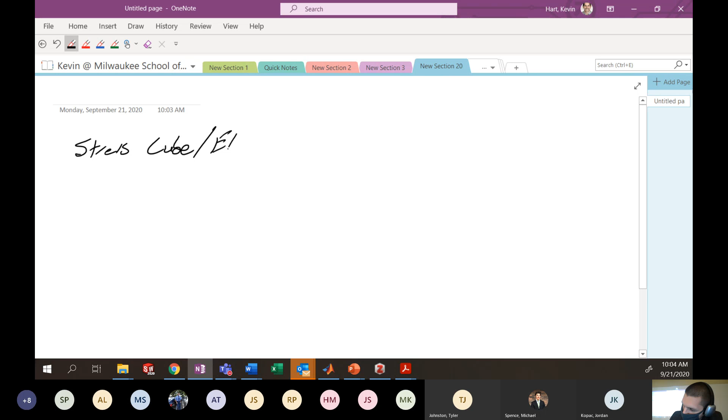Remember this stress cube that we had here sort of looks something like this. And it represented the 3 orthogonal cuts we could make at any particular point in a material, and the 9 states of stress that might result from those 3 orthogonal cuts. If you have something here like XYZ, you could have your series of stresses, the normal stresses coming off of each one of these faces, like sigma Z, sigma Y, sigma X, as well as the shear stresses that you could possibly have. I'm not going to label them all because I'm a little short on space here.

But you get the general idea. Here are the shear stresses tau-ij on all the faces. Remember, when we're talking about using subscripts ij, we're talking about the i face and the j direction. So this is our stress cube and element, and I was relating this back to what you probably learned in 2004.

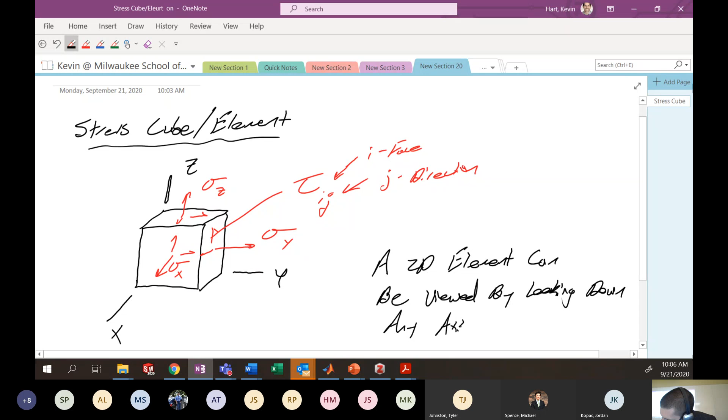That was like one side of this particular cube, which is like a two-dimensional element. A 2D element can be viewed by looking down any axis. This is probably what you saw in 2004. So if we, for instance, looked down the z-axis...

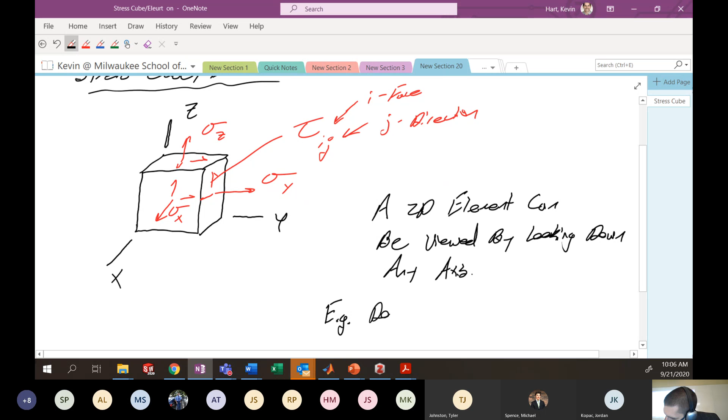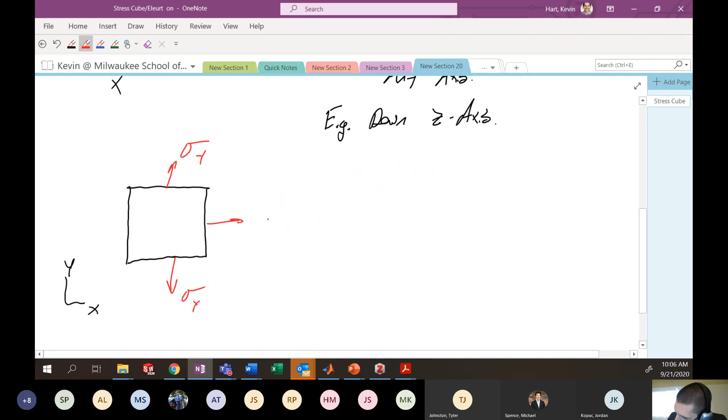You might see something like this, where we might have x, y, and you would see stresses coming off of this particular element. Here are your normal stresses in y. Here's your normal stress in x, sort of on both sides. And then you have your shear stresses, which are acting on their appropriate faces and directions. So here's something like tau-xy. And all these shear stresses I've drawn here are more or less equivalent.

So we know that on the top face you would have what is tau-yx, on the y face in the x direction, but they're equivalent by conservation of momentum. So those are your possible stress states on a 2D element, and here we're assuming plane stress...

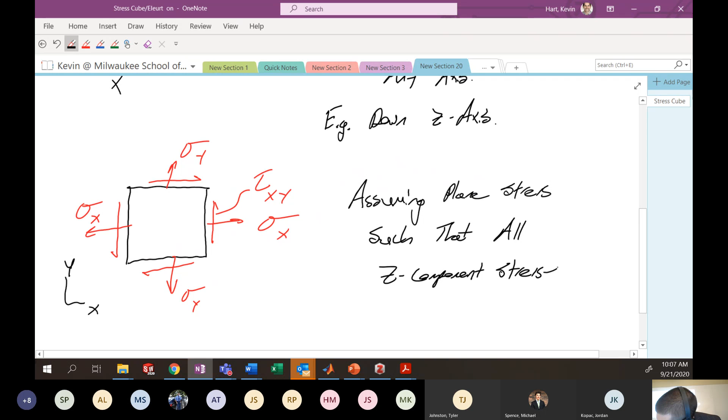Plane stress such that all z component stresses are 0. So that would be like normal stress in z and any shear stress associated with z.

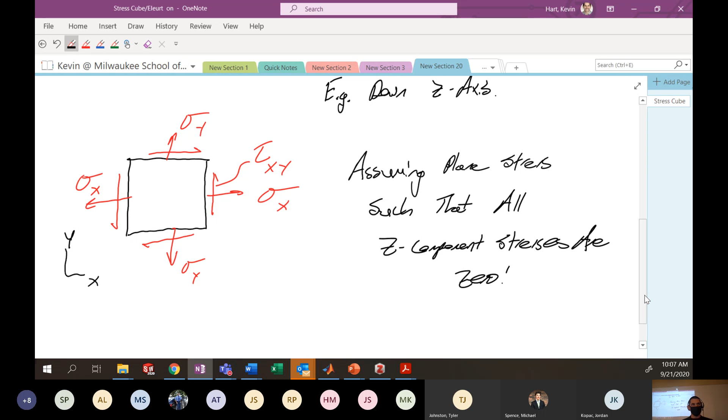So tau-xz, tau-yz, tau-zy, tau-zx - all of those components are 0, and this is probably where you did a lot of work in 2004 on an element that looked a lot like this. So I'm reviewing this, and one of the first things I want to talk about is stress transformations, and that's about where we left off.

We were looking at this particular element, and we want to talk about the stress not in this coordinate system, but some alternative coordinate system that is rotated from this xy coordinate system some amount. So, stress transformation.

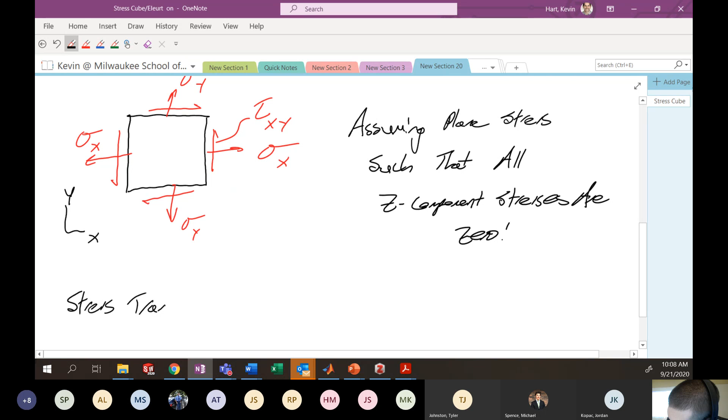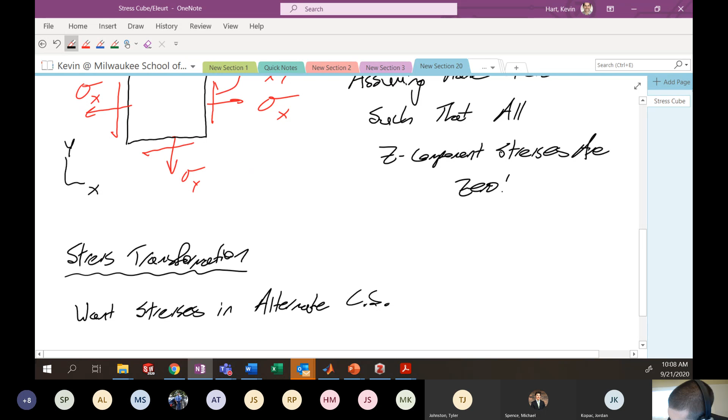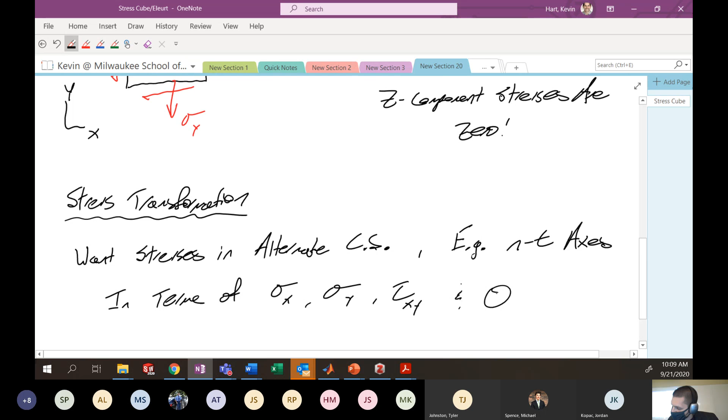If we want stresses in an alternate coordinate system, let's say the n-t axes, in terms of sigma-x, sigma-y, tau-xy - these stress values that we already know in our current coordinate system - and the rotation angle theta, which exists between the xy coordinate system and the coordinate system you want to rotate to, which might be the n-t coordinate system...

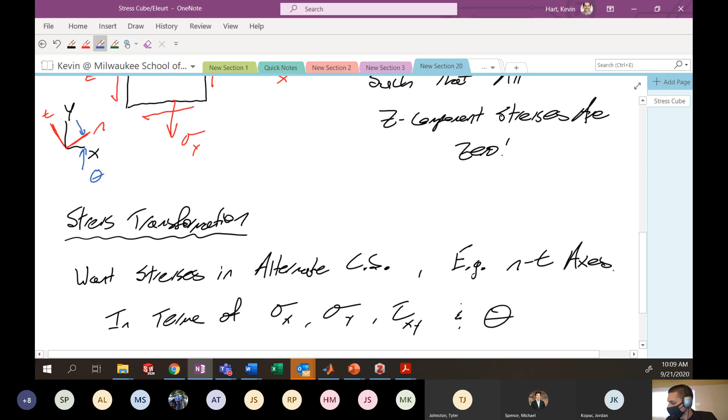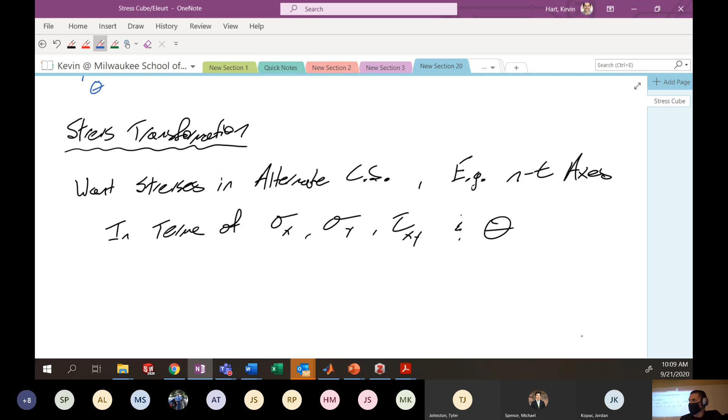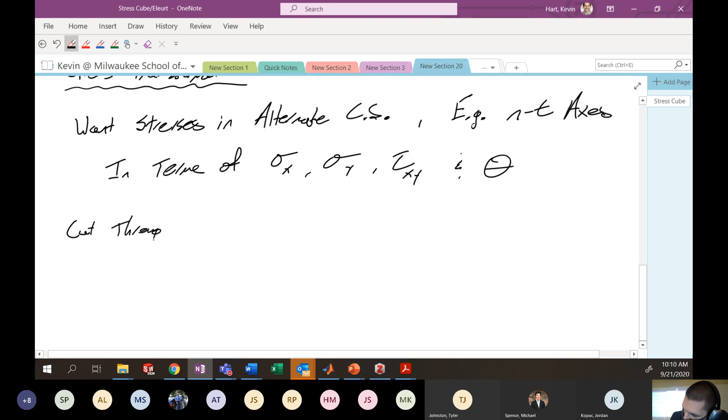So we looked at how to do this, and the basic way we're going to do this is we're going to cut through our two-dimensional element, sort of along the t direction, to get what looks like a triangular element. So cut through the t-axis, and you're ultimately going to end up with some triangular element that looks like this here.

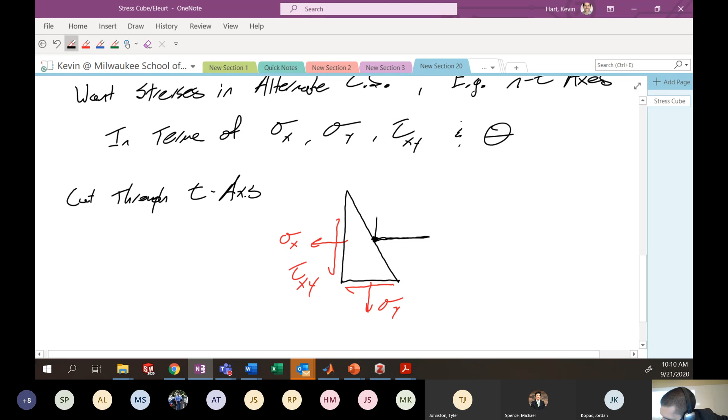Where we still have, on the backside of our element, the x and y components of the normal stress, and we're going to retain our shear stress on the backside in terms of what we know. And we have our coordinate systems - let's establish our coordinate system at the center of this cut section here, which is x, y. And we have our new coordinate system coming off of this general direction, which is n and t.

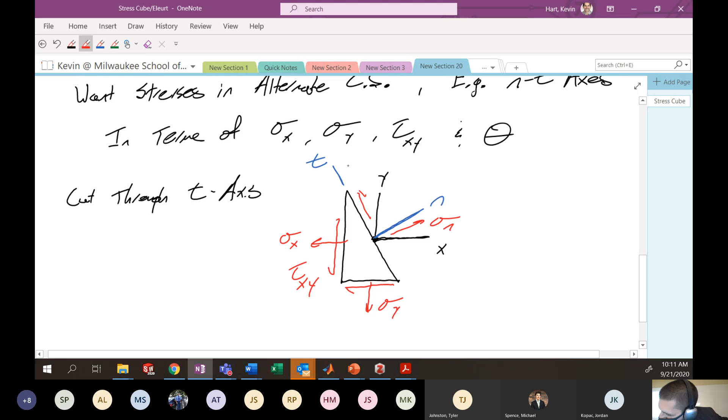So what we're striving for is what is the normal stress on this new face that we've created, and what is the shear stress on this new face. So we're looking for what is this sigma-n, and what is the shear stress across this face, which is tau-nt. I'll put these question marks here, because that's what we're after.

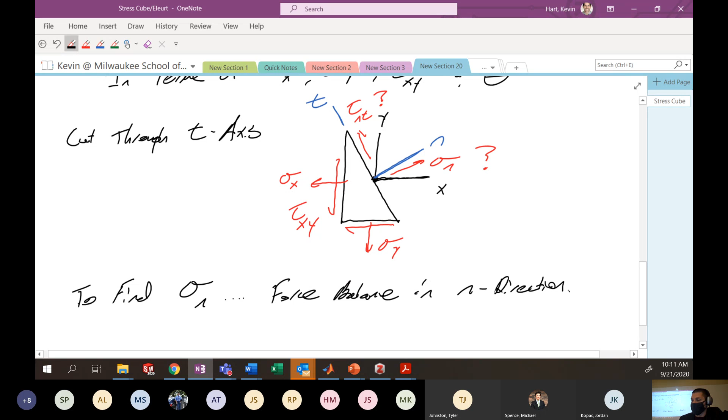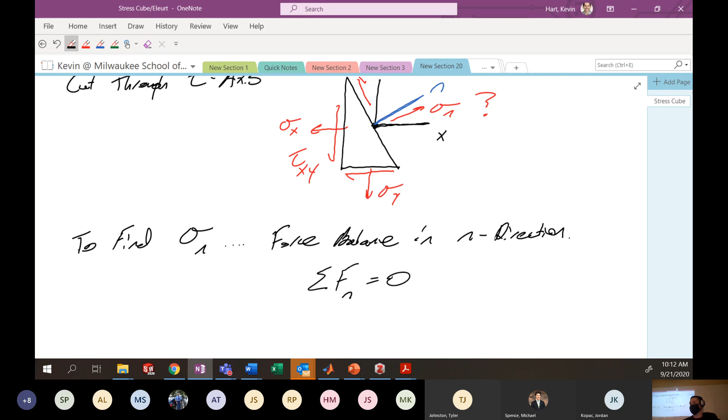So we started in on this last time, and we went through the derivation and said to find sigma-n, we want a force balance in the n direction. So in math terms, since we all speak math, the sum of the forces in the n direction is equal to 0. So what that means is we have to turn all the stress components we see into force components, and then equate them all to 0, and see what we get.

So we went through that rigmarole last time, and I'll wave my magic hand and point you to that lecture, which was in the Wayback Machine on Friday.

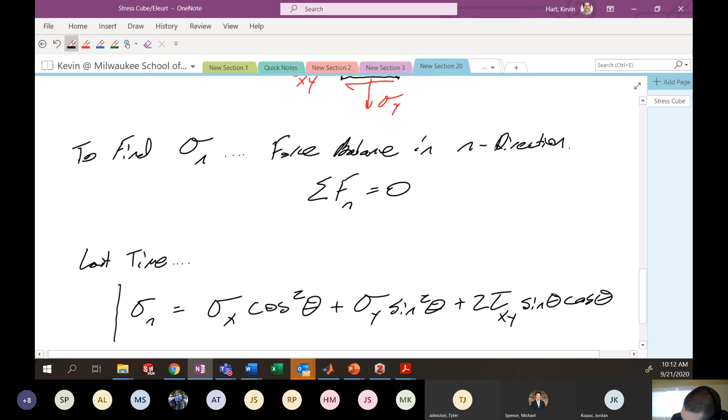We established this equation. We found that the normal stress in the n direction after this transformation is sigma x cosine squared theta plus sigma y sine squared theta plus 2 times tau xy sine theta cosine theta. This is the expression that resulted after we did our force balance to get normal stress in the n direction in terms of stresses you already knew in the xy direction and tau xy, as well as the rotation angle theta between your coordinate systems. This is the stress transformation equation that tells us this new normal stress.

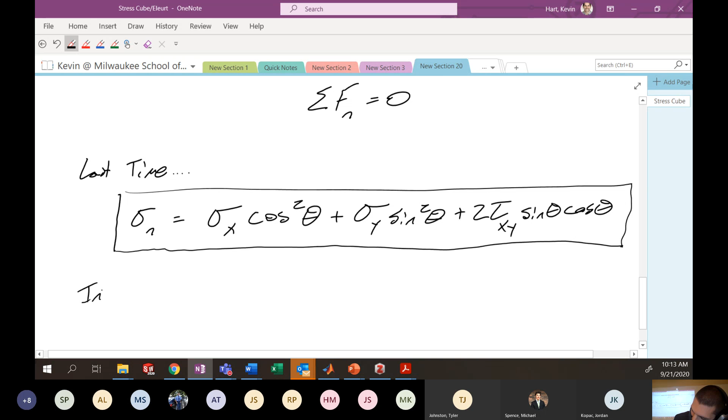Now, it is often presented in a different form, using the double angle identity. We can transform a cosine squared term into a cosine 2 theta term, and it's sometimes presented that way. I'll just write this without the derivation, which you may or may not have used before. I'm hoping you saw at least this standard equation with cosine squared, sine squared terms. Maybe you used the double angle form, which looks similar, with a couple of caveats.

Sigma x plus sigma y over 2, plus sigma x minus sigma y over 2 times cosine 2 theta, and this is going to be plus tau xy times sine 2 theta. So this is the double angle form of that exact equation.

These equations are equivalent. They'll give you the same answer regardless of which one you use. I think the double angle form is on your equation sheet, so maybe that's generally preferred, but I present both here for clarity's sake. Both of these equations can be gotten from the force balance in the n direction.

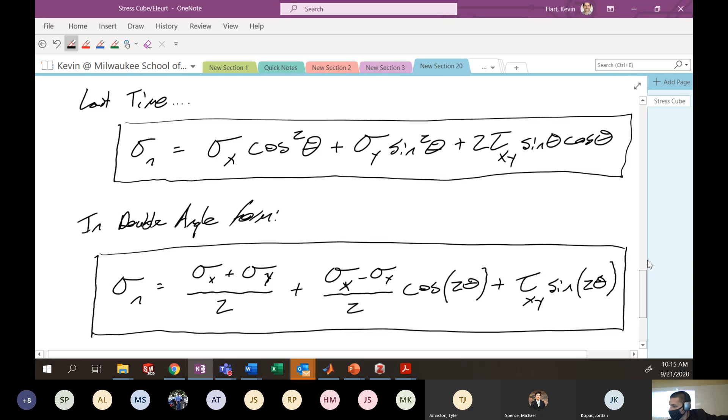Now, we could go through a similar procedure with a force balance not in the n direction, but in the t direction. We've calculated what is sigma n. If we go back to our element up here, that's a check mark for sigma n. But now we also want to determine tau nt, this shear stress across the face.

The shear stress is mostly aligned in the T direction. So it's on the N face in the T direction, so we're going to do a similar thing, where we do a force balance not in the N, but in the T. I'm going to gloss over that. So for tau nt, use sum of the forces in the T direction equals 0. Good old statics, right? Sum of the forces in one direction, sum of the forces in the other.

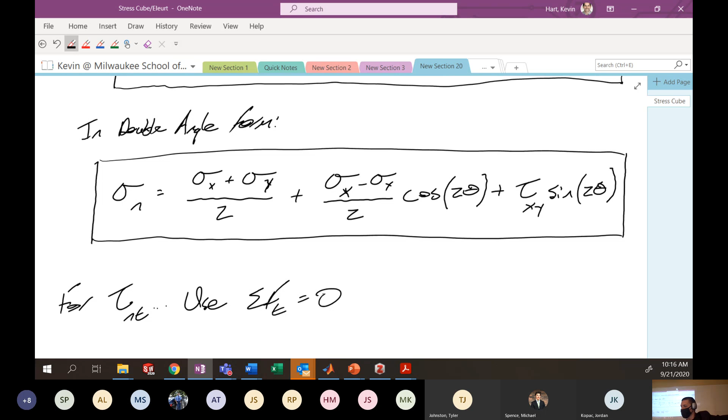Could also do sum of the moments, but since this is an infinitesimally small element, we don't have any moment arms, so that's not really helpful. It's a similar idea, similar derivation. I'm not going to go through the whole derivation, I'm just going to present the final result.

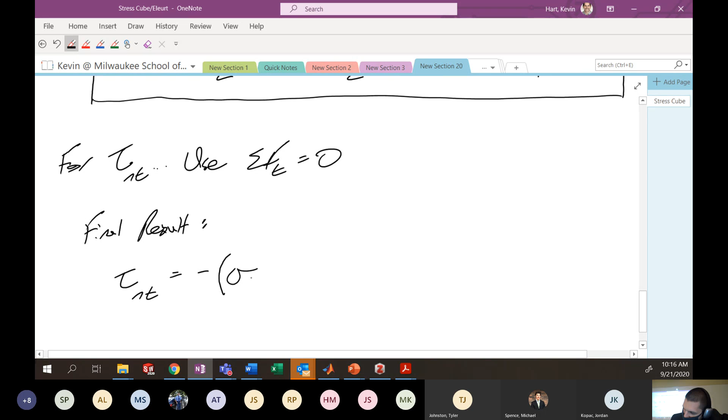That is, if you need the shear stress in this alternate coordinate system on the N face in the T direction, you're going to have negative quantity sigma x minus sigma y times sine theta times cosine theta. And this will be plus tau xy times cosine squared theta minus sine squared theta.

All right, this is the single angle form. If you're feeling really antsy, you can derive this yourself, and I'll be very impressed. I'll give you a gold star. I'll literally go to the store and buy some gold stars and give them to you.

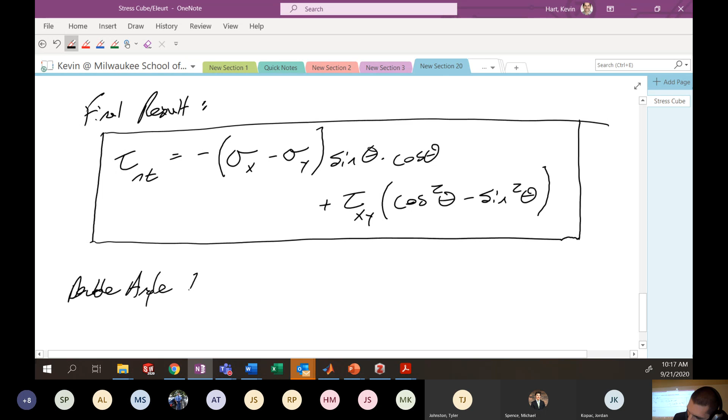All right, so the double angle form is going to be the negative quantity sigma x minus sigma y, all this over 2, times sine 2 theta. And then this is plus tau xy cosine 2 theta. So this is the double angle form.

Now, why would these stress transformation equations generally be useful? Well, you've kind of already seen an example of how it could be useful in your lab. We have these strain gauges that are plopped onto your piece. Let's say the strain gauges give you some strain reading in some direction and you convert that to stress in that direction. But the stress you have with that coordinate system is not necessarily the coordinate system you want. You might have to do your stress transformations to get to the coordinate system you care about, and this is how you might do that.

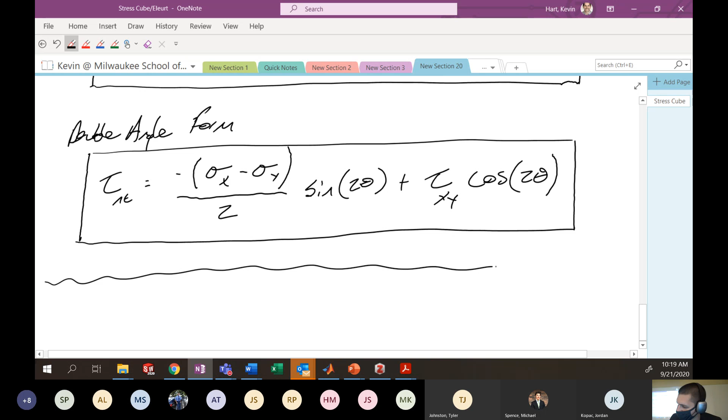This is where I would take a sip of my coffee. I remember those previous times when I could have drinks in class. The good old days.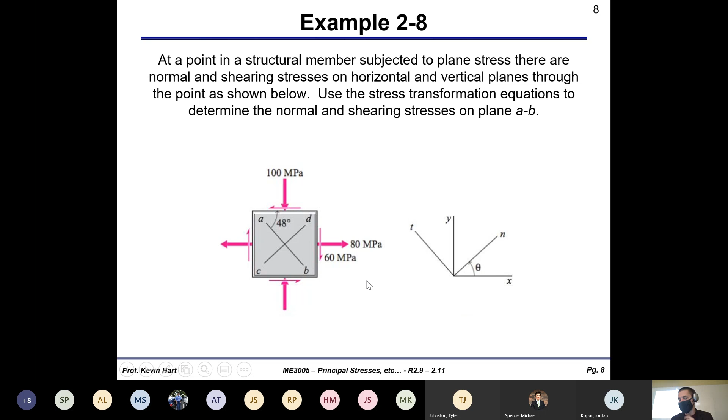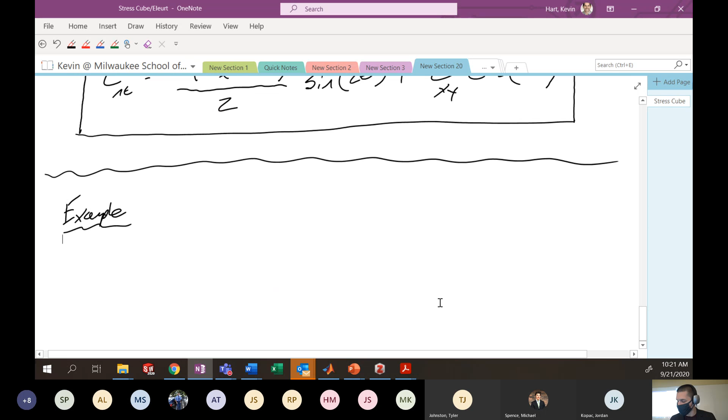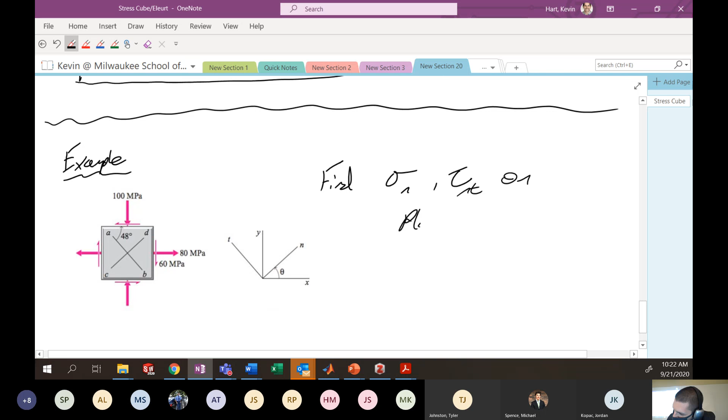We want to find normal stress and shear stress on AB. So that is sigma n and tau nt on plane A, B. Yes, that's kindergarten. Yes, all right.

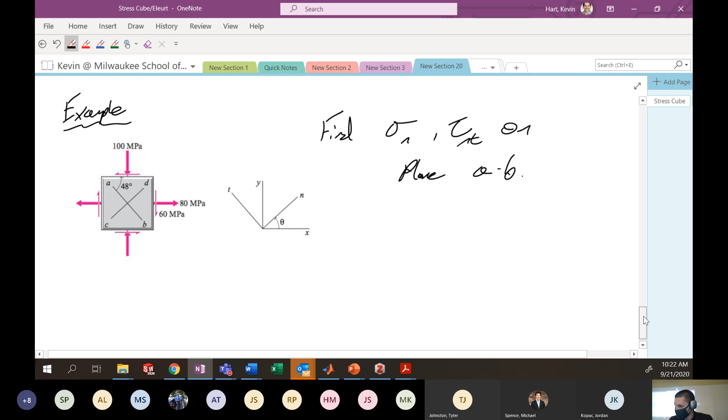So we're going to utilize our equations here, but I want to just write down things that we know and present our element accordingly. All right, so some things that we know straight away here. So first would be like what we know.

So we know that we have a stress in the x direction, which is what value? Someone in the audience. 80 megapascals, good, 80 MPa. We have a stress in the y direction, somebody else, what value? Negative 100, good job, gold star for the day. All right, it's negative because we're in compression here, sort of pushing downwards.

And then we have a shear stress, tau xy. Who wants to tackle this one? Positive or negative? We know the magnitude's 60. Positive or negative? Anyone else? Negative, all right, you're 1 for 2 on the day, so all right, that's good. So why is it negative? Let's talk about why it's negative.

So here's our arrow for the 60 MPa. We'll notice that it's on the positive x face and the negative y direction. So positive x face, negative y direction, this is going to give me a net negative, okay? You could look at any of the arrows and identify that. So here, this arrow, you're on the negative y face, positive x direction. All right, this arrow here, positive y face, negative x direction. They should all give you that same idea. Negative x face, positive y direction. All right, so hopefully we see that and understand that. So I'm going to get a net negative from this shear stress.

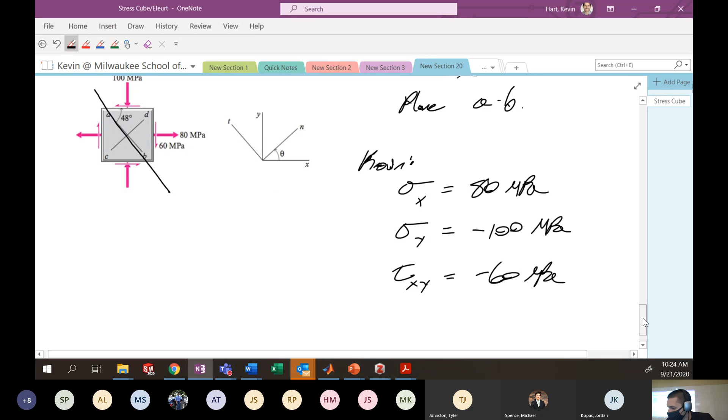All right, so now if I cut through AB, just like that, this is the cut that I'm going to have. I'll create an element that looks triangular, kind of like the one that I have shown previously. So let's take a look at what that element will look like.

And let's assign our coordinate system accordingly to make sure that we have the right rotation angle for this problem. All right, so here we are with our standard coordinate system, our x and our y. And we want to know basically what the normal stress is in this direction, and we want the shear stress on this face as well. So we'll define our t-axis, and we want nt.

So we know that the equations that we're about to use will utilize the variable theta, which is the rotation angle between the xy axis and the nt axis. And so we need to define ourselves what is this angle theta. This can be a little tricky sometimes, so be mindful.

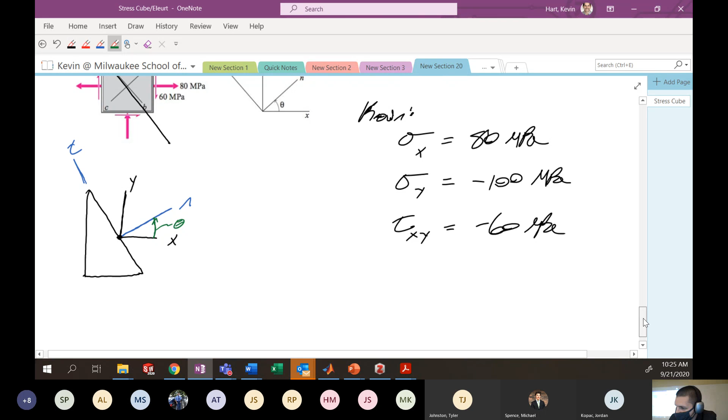So we're given information about this cut, specifically this 48 degrees here, which is from the horizontal at the top. So if I wanted to represent this on my triangular element here, maybe this angle here is 48 degrees, equivalent to the temperature of my heart. Okay.

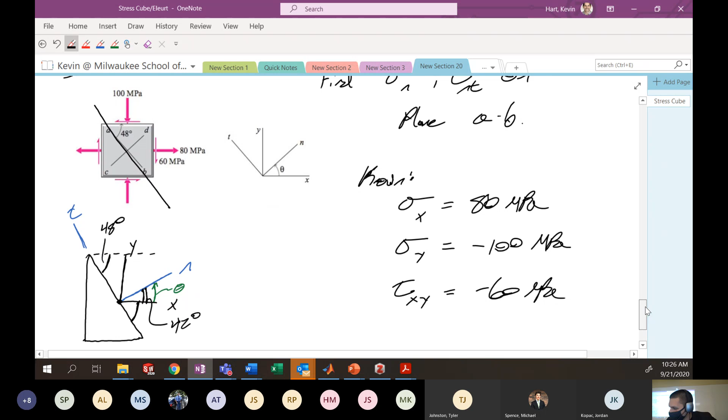So that means that this angle is also 48 degrees down here. So the angle that is theta here will not be 48 degrees, but will be the complement of 48 degrees. It's complementary, and so here we have 42 degrees. All right, so in this particular problem, we're going to use the value of theta, 42 degrees, to get our appropriate transformations.

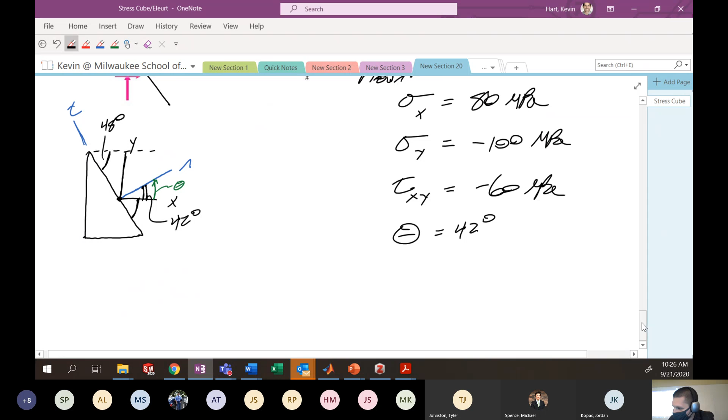All right, so away we go. It's probably the hardest bit is just defining the stress components correctly. I'll use the double angle formula here, because why not?

Reminder, that's sigma x plus sigma y on 2, plus sigma x minus sigma y on 2 times cosine 2 theta, and then this is going to be plus tau xy sine 2 theta.

All right, now all these values we have, I'm just going to go ahead and plug and chug them. Just a reminder, I'm just going to work in MPa. I'm not going to write MPa with every single entry of the stress, just understand I'm working in MPa here.

This is going to be 80 minus 100 on 2, plus 80 plus 100 — remember that sigma y is a negative value — on 2 times cosine of 2 times theta. 2 times 42 is 84 degrees, I did that in my head. Plus my negative 60 sine 84.

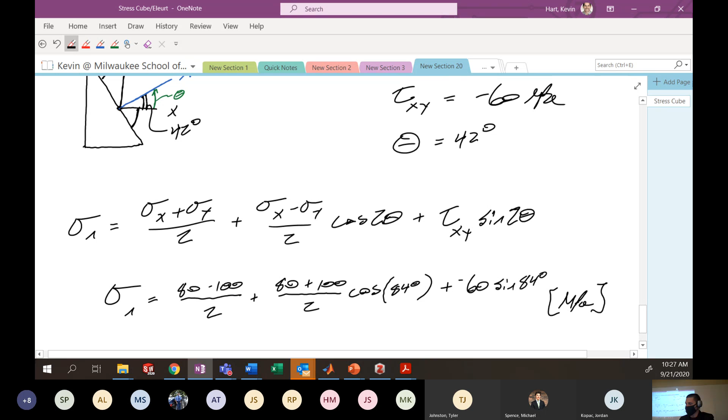So then the normal stress on that cut face, after working through this, will be negative 10 plus 9.4. I'll just show each of the contributions accordingly: minus 59.7. Still working in MPa, this will give me a total normal stress on this particular surface of negative 60.3 MPa.

Okay, so that's the normal stress on that cut face. All right, now the shear stress.

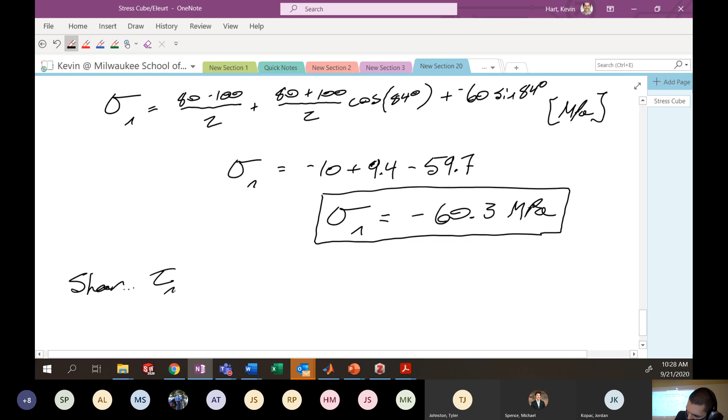Similar idea. These are equations that are derived from summing the forces in the t direction: negative sigma x minus sigma y on 2 times sine 2 theta, and this will be plus tau xy cosine 2 theta.

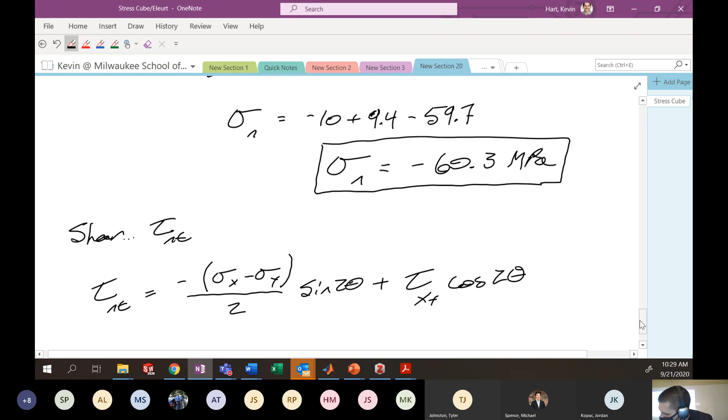All right, I'll assume you can plug values in here. Again, we'll use the same values for sigma x, sigma y, tau xy, and theta. You should end up with negative 95.8 MPa.

Okay, so that's how do we utilize these stress transformations.

All right, now one quick question I just want to go over that I sometimes get is: yeah, we figured out what the normal stress is in the n direction. What if we want the normal stress in the t direction? Okay, what's our method? Anyone suggest some method? It's simplistic based on what we already have.

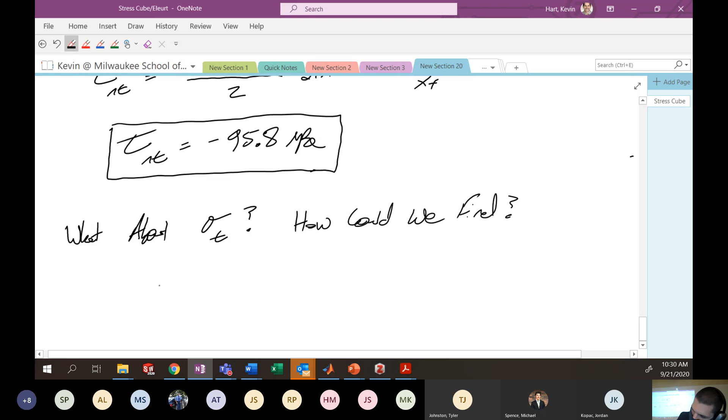What would be the normal stress in the t direction? Would you just add 90 degrees? Yes, perfect, person in the chat says add 90 degrees to the angle of theta. That's exactly right, right? So if we have x and y, and we have n and t,

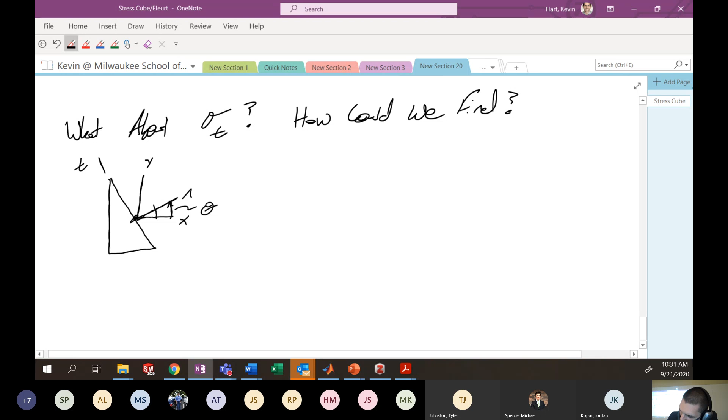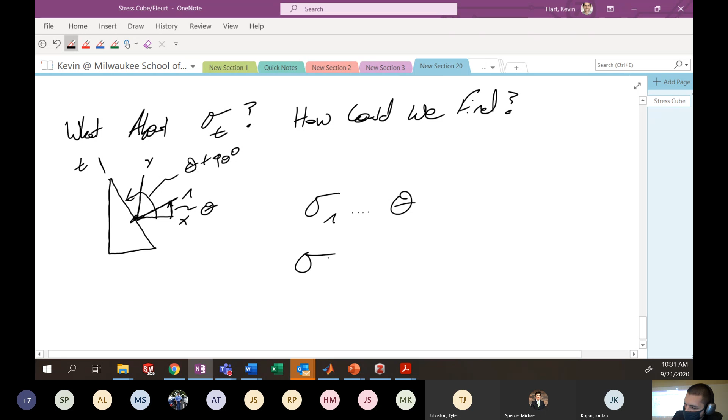we know that this angle here is theta. We know that this angle here is theta plus 90 degrees. So sigma n I get with the angle theta. Sigma t, I could use the sigma n equation, but with the value for theta of theta plus 90 degrees. So instead of using theta, use theta plus 90. So in this example, instead of using 42, use 132 degrees. This is how you might go from stress in like an xy coordinate system to an x prime y prime coordinate system, right?

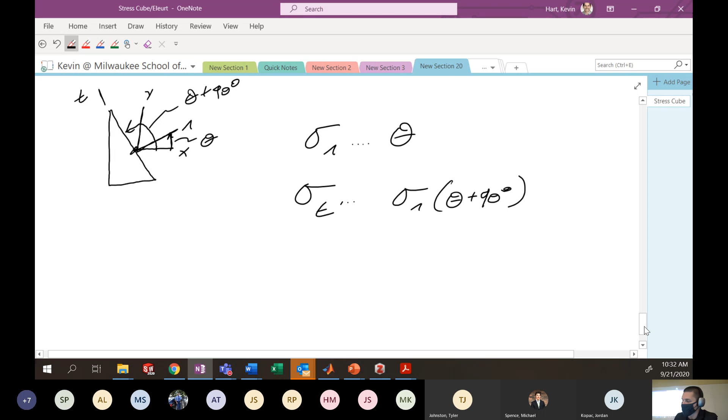All right, cool, let us continue. And thank you for whoever said that in chat. I didn't catch who that was, but good job.

All right, those are your stress transformations. Next topic is principal stresses, something you probably should have discussed in 2004, but again, sort of building up the foundation because I don't know how the 2004 went for you guys.

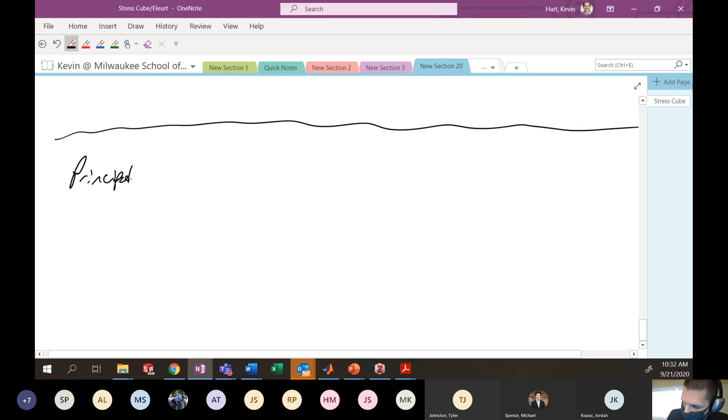And I also like to have this conversation too, because we're doing all this in 2D right now, and we will do this in 3D. So yeah, it's gonna be, instead of slicing through a 2-dimensional square, you're gonna slice through a 3-dimensional cube. Hot diggity, all right.

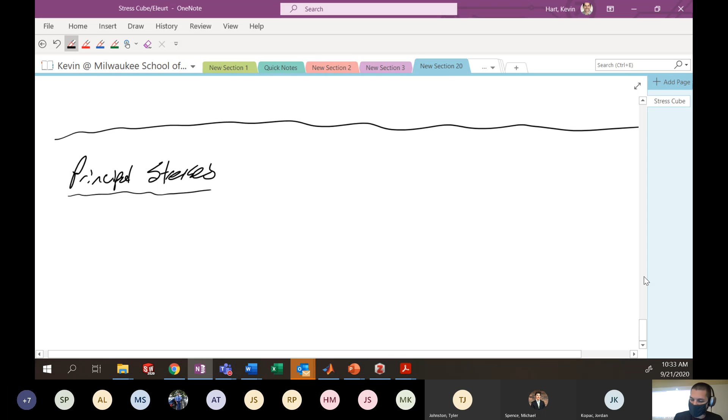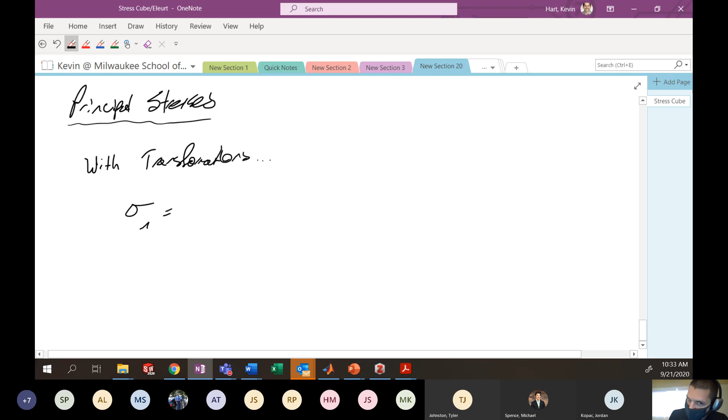And see what happens in that situation. All right, principal stresses, let's just talk about a general concept first. Remember that we have this general equation that tells us what the normal stress is in any arbitrary direction, okay? So with transformations that look like the following, I'll write the single angle formulas.

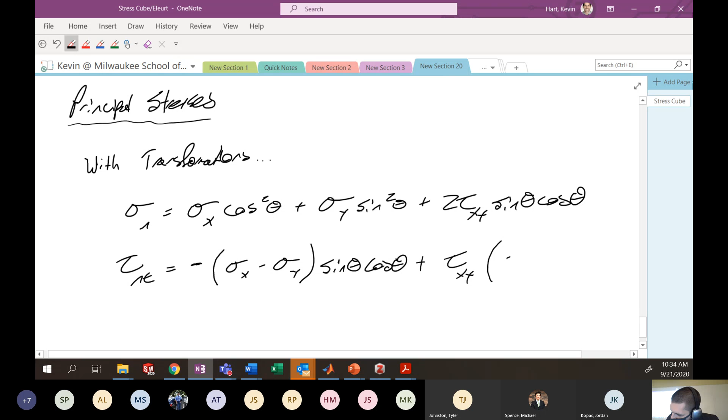Okay, so with these general equations, cosine first. All right, with these general equations, we could see that the normal stress in any direction is going to change as we rotate or look at the values of the normal stress in different coordinate systems.

So if we're starting at some xy coordinate system that we know, and we just rotate through and look at, all right, what is the normal stress at 5 degrees from that, 10 degrees from that, 15 degrees from that, etc., you'll understand that the normal stress and the shear stress in each one of those general cuts that we make is going to be different based on the value of theta that we have. Okay? That means that if these values are changing as we sort of swipe through and move through the rotation of our coordinate systems, there is some rotation angle that will maximize and minimize the normal and shear stresses that we see.

So we might then pose the question: at what value of theta are sigma n and tau n t max or min? All right, how do we do this in a calculus way? Someone, if you're asked to find the maximum or minimum of a function in calculus, how do you do this?

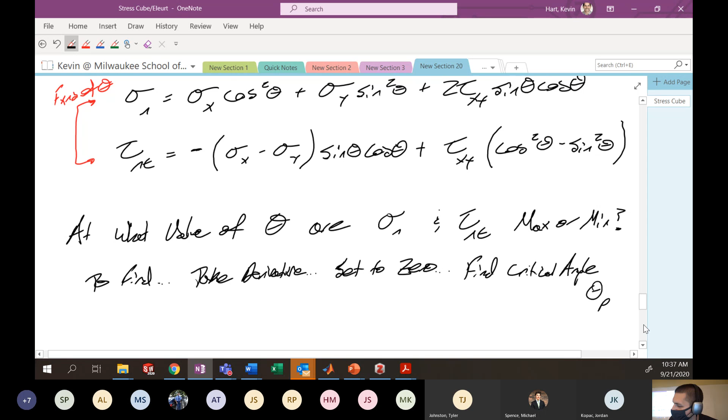That value and that rotation angle is the principal rotation angle for maximum shear stress or principal stress. So here's the idea: take derivative, set to 0, and find critical angle. I'll call it some critical angle theta p, some principal rotation angle that will get us to that point of maximum or minimum normal stress or shear stress. Take derivative, set to 0, find critical angle theta p.

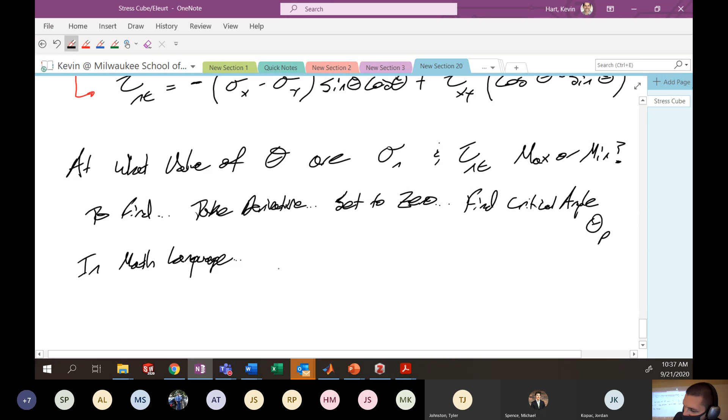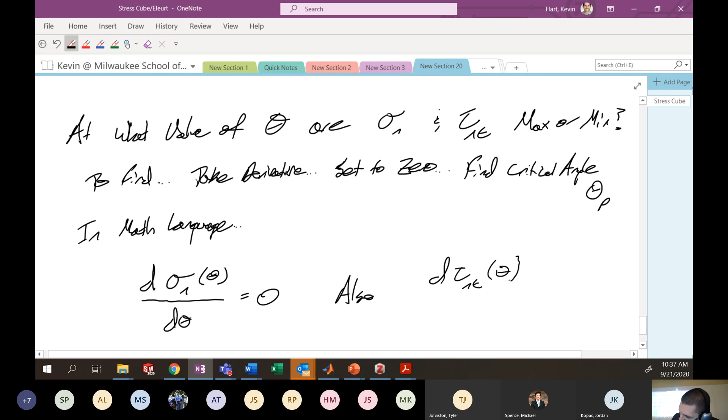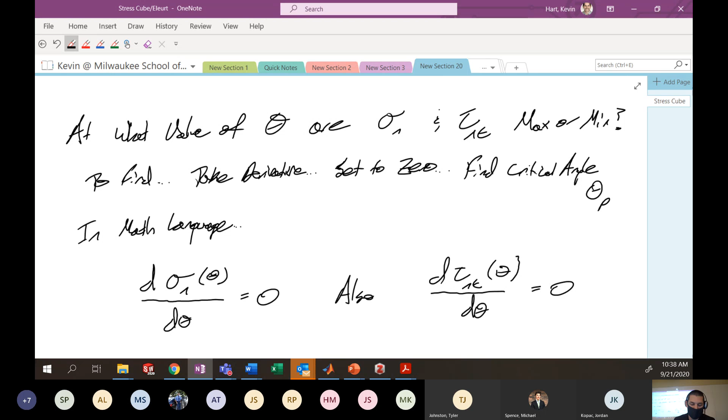So in math language, which we're all more comfortable with, I speak math. I want to take the derivative of these functions, that is the derivative of the normal stress, which is a function of theta, with respect to theta, and set it equal to 0. Also, I want to take the derivative of this shear stress transformation equation, which again is a function of theta, and set it to 0. Each one of these derivatives is going to get me a principal value of theta which will maximize or minimize the value of sigma n or tau nt. Those maximum values of tau nt or sigma n are going to be your principal stress values.

Give principal values and max shear stress. Something like that. That's the general idea.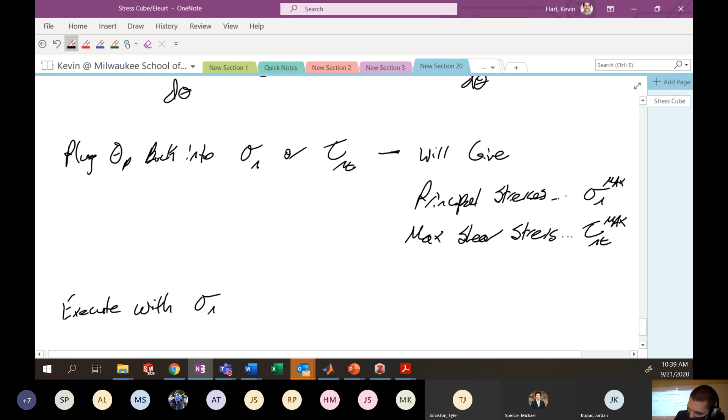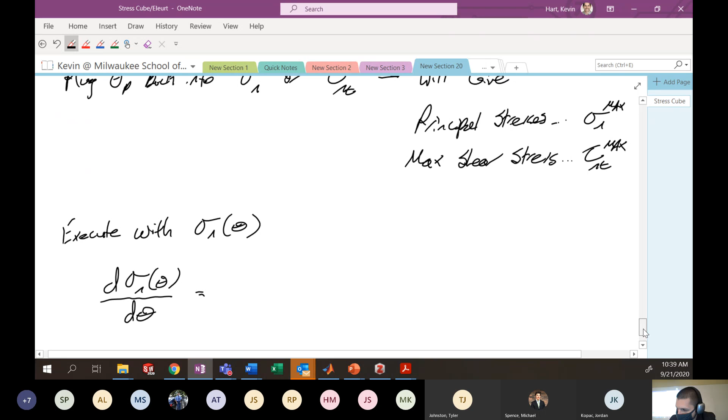So let's execute with what is sigma n, a function of theta. The derivative of the normal stress with respect to theta can pop up here to our double angle, or our standard form. Reminder here, this is the equation I'm taking the derivative of, it's our transformation equation. So the first derivative of this with respect to theta, we can just go through that.

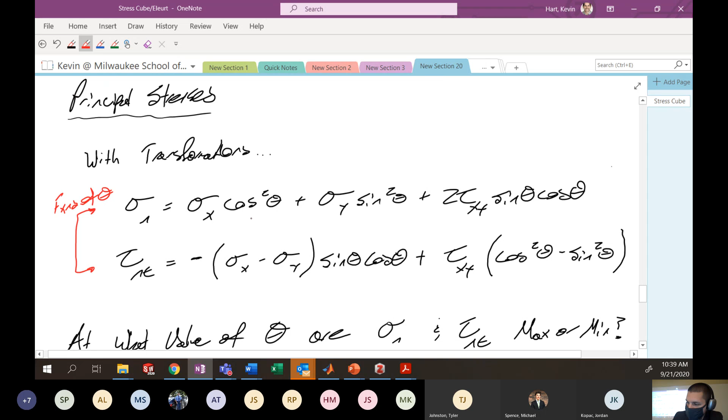The derivative of cosine squared theta is pretty straightforward. You can either do this with single or double angle identities, and we'll just go through it that you're going to get, after executing this, I guess this is the derivative of the double angle form, but same idea. Probably a little easier. Here's your derivative from double angle form.

And a reminder, we're going to set this equal to 0 so that we can determine what that value of theta is that maximizes or minimizes this function. So let's divide everything by cosine 2 theta, and you're going to have something like negative sigma x minus sigma y times tangent of 2 theta plus 2 tau xy, equals 0.

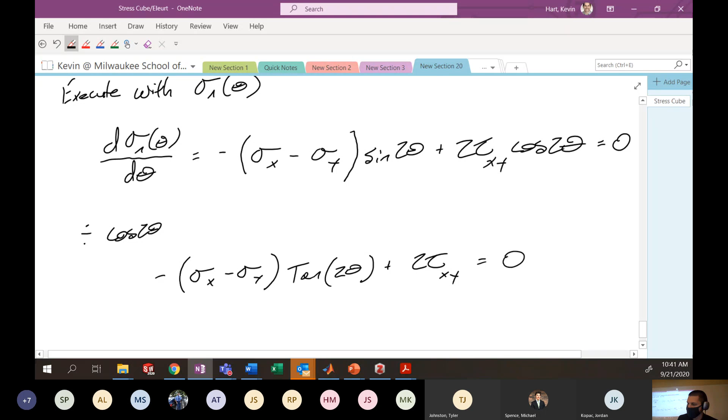All right, we're trying to isolate theta, so let's continue. Or finally, this principal angle that will give you the maximum normal stress and the minimum normal stress, because the derivative set to 0 will give you maximums and minimums. So your principal angle, which I'm going to call theta p, after working through, is going to be 1/2 the inverse tangent of 2 tau xy over sigma x minus y. So this is how we calculate the principal rotation angle to get us maximum and minimum normal stresses.

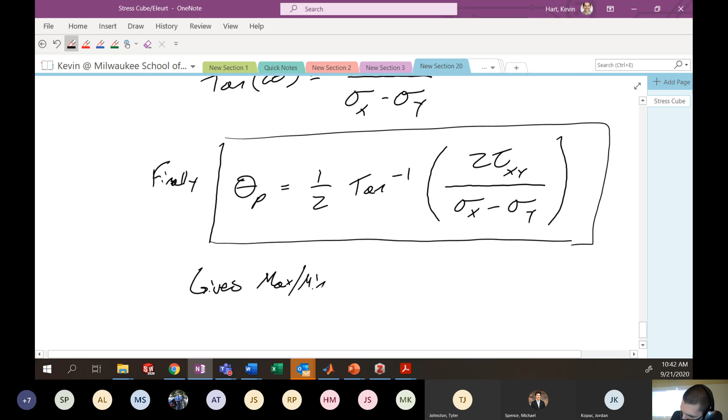On the domain 0 to 360, how many answers will I have for the inverse tangent function? Two, thank you, one for a maximum and one for a minimum. All right, so 2 values on the domain 0 to 360 degrees. All right, sweet.

Now let's take that expression for the variable theta p, and we're going to plug that back into the stress transformation equation. Remember, if you're trying to find the maximum value of a particular function, take the derivative, set to 0, plug that value that makes the derivative 0 back into the original function to get your maximum or minimum value. So plug theta p back into your transformation equation.

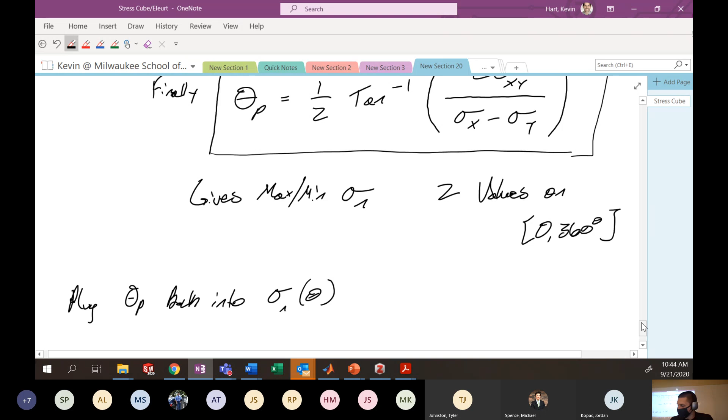This will give you, and I'm not going to go through the derivation because it's actually quite a bit of math. You're working with inverse tangent functions, which gets plugged into sine and cosine. You'll end up with an equation which should look familiar.

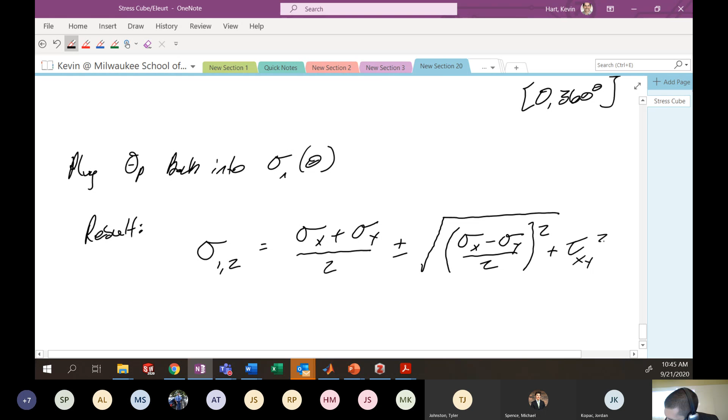Sigma 1, 2, this is how we denote principal stresses, equal to sigma x plus sigma y divided by 2, plus or minus the square root of the quantity sigma x minus sigma y on 2 squared plus tau xy squared. Raise your hand if you've seen this equation before. Yeah, okay, everybody's hand should be in the air, and you should wave them around like you just don't care.

So here, this is your principal stress equations. These are the values of max and min sigma n. Maybe you saw this clearly defined before, maybe you didn't. Maybe you saw where this came from, maybe you didn't. Hopefully, after my explanation, it's pretty clear where it comes from. We have these stress transformation equations, take the derivative, set to 0, plug that back in. There you go with your principal stresses.

I go through this process because we're going to mimic this process in 3D. When we go to 3D, you're going to have an equation for stress transformation for any arbitrary plane that we can create with a normal direction defined by unit vectors. Complicated. We're then going to take the gradient of that equation, which is the three-dimensional derivative, to determine what is the principal stress in 3D.

Who's scared? Are you guys scared? I'm scared. I'm the teacher, I'm scared. So I go through this process in 2D so that we're all clear on what's happening. Then when we go to 3D with gradients and everything and you're crying, at least you understand what's going on. You don't know how to do it, but you know what we're doing.

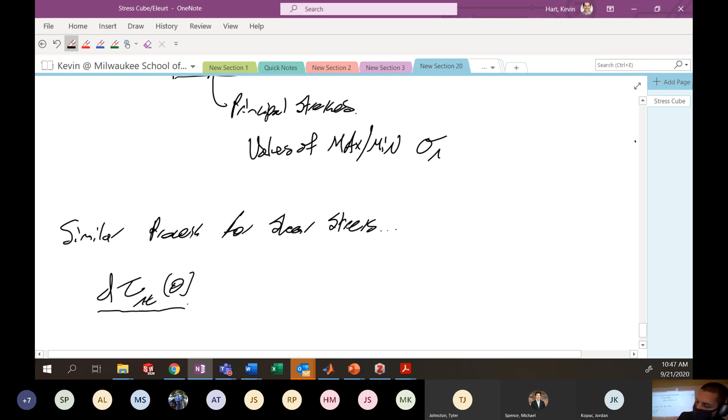Similar process for shear stress. The idea here is that we take the derivative of tau nt, which is a function of theta. Again, our stress transformation equations, but now for shear instead of normal stress. Take the derivative with respect to theta. Here we're going to have negative sigma x minus sigma y cosine 2 theta plus 2 tau xy sine 2 theta. All this equal to 0. We're setting the derivative equal to 0.

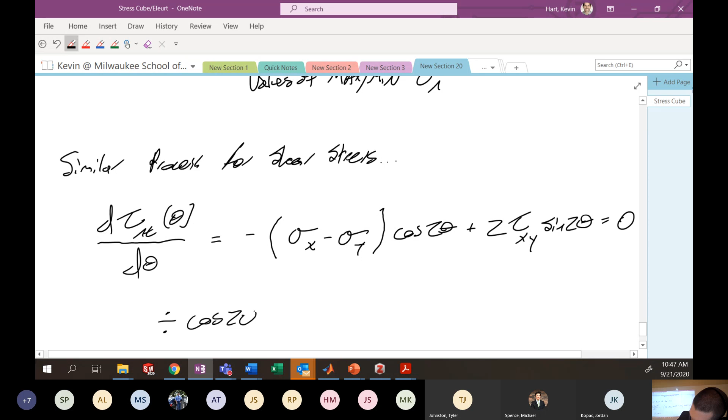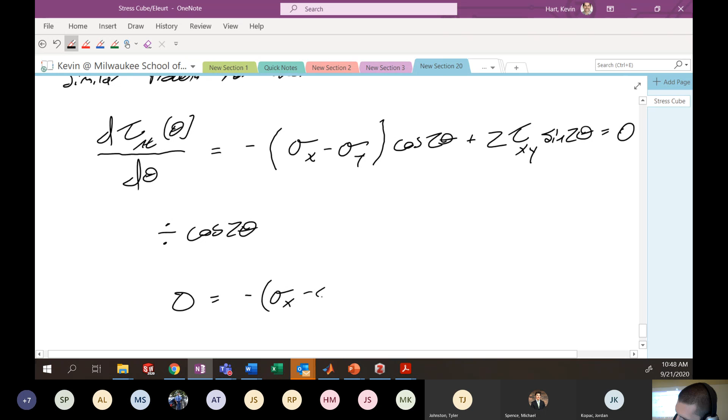We can again go through the same process. So we divide by cosine 2 theta. Again, I'm using this division sign I haven't used since 1997. Before you guys were even born - no, I'm just kidding, maybe some of you were born, I don't know, I'm old now. And we're going to have something like 0 is equal to negative sigma x minus sigma y plus 2 tau xy tangent 2 theta.

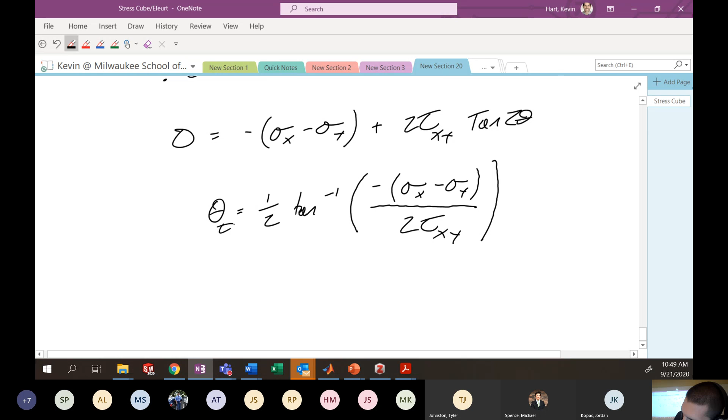Continuing downward, we'll isolate theta, and you'll end up with theta equal to 1/2 tangent inverse of negative sigma x minus sigma y - sometimes you see it as sigma y minus sigma x, kind of the same thing - over 2 tau xy. Usually we'll label this particular principal angle not with a p, but with a tau, because it's for the shear stress.

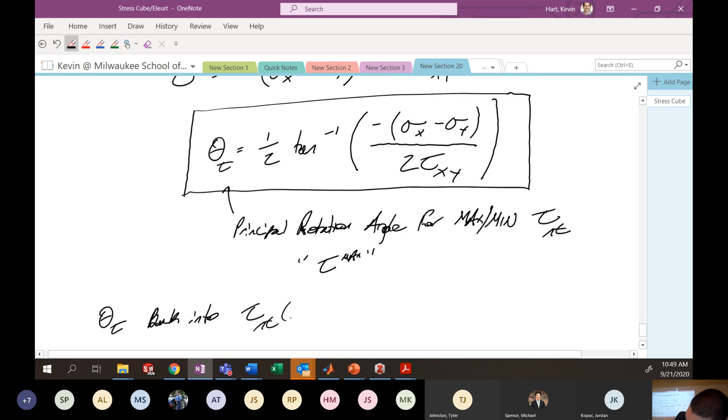Principal rotation angle for max, min, tau nt, or what's sometimes called tau max. So let's take theta tau back into tau nt as a function of theta, and you'll end up with the following expression. Tau nt, or what I'll say is tau max, is equal to plus or minus the square root of sigma x minus sigma y divided by 2 all squared plus tau xy squared.

Which you'll notice is like the second half of the principal stress equation. Hopefully we've all seen this equation before as well. This is your radius of your Mohr's circle, if you like that analogy. I personally think Mohr's circle belongs in the trash can, but that's a discussion for another time. I don't do Mohr's circle in this class, I think it's a waste of time. So if you like Mohr's circle, maybe you can do it - I understand it if you write it on your paper what you're doing, but you're never going to see it out of me. I speak math, I don't speak circles.

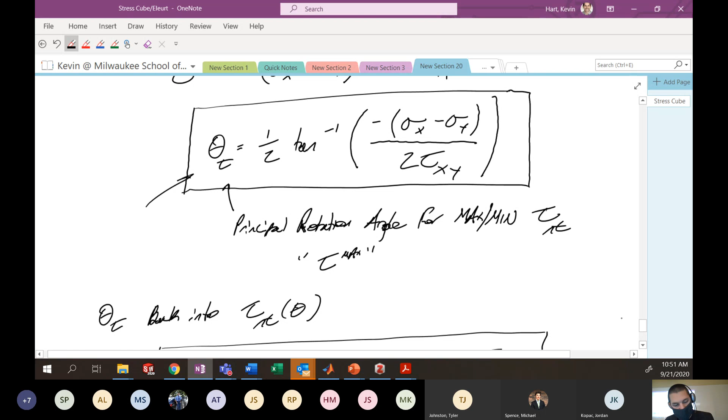So here's your maximum shear stress. Again, can be gotten from the angle here, just plugged back into the equation for tau nt. On 0 to 360, again, you have two solutions - one will give you a positive shear and one that will give you a negative shear, but the magnitudes will be the same.